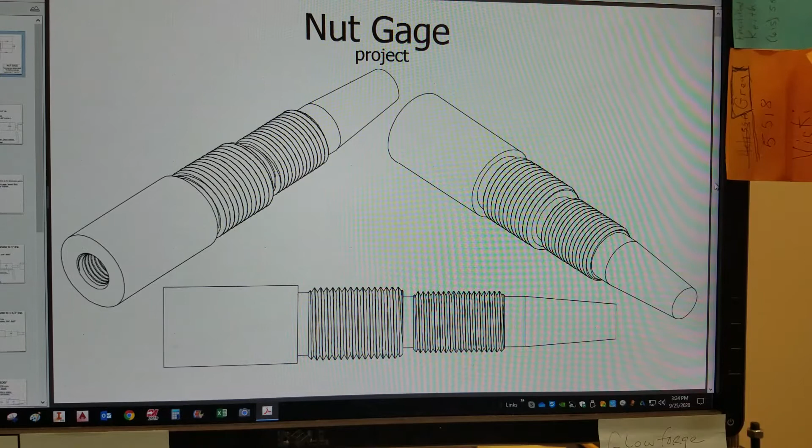Okay, this is the nut gauge project for the ET3210 lab. So let's get started on it. First, there's a couple of dimensions. Well, all the dimensions for the nut gauge. So let's get started with step one. We're going to cut a piece of 1 inch diameter, 6 inches long. So let's go to the cutoff saw and do that.

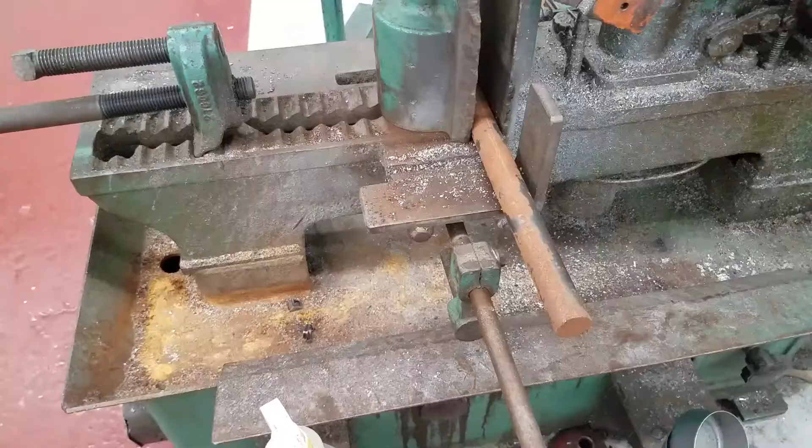There's my 1 inch diameter. I'm going to lower the saw, lock it in. Get a 6 inch piece.

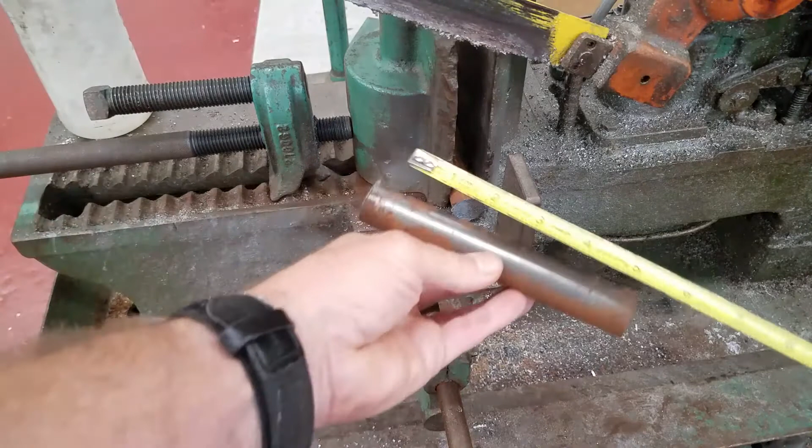Double check it. Close enough. Now we can go to the lathe, face it off and center drill it. Always remember to put your material back in the steel rack or the aluminum rack.

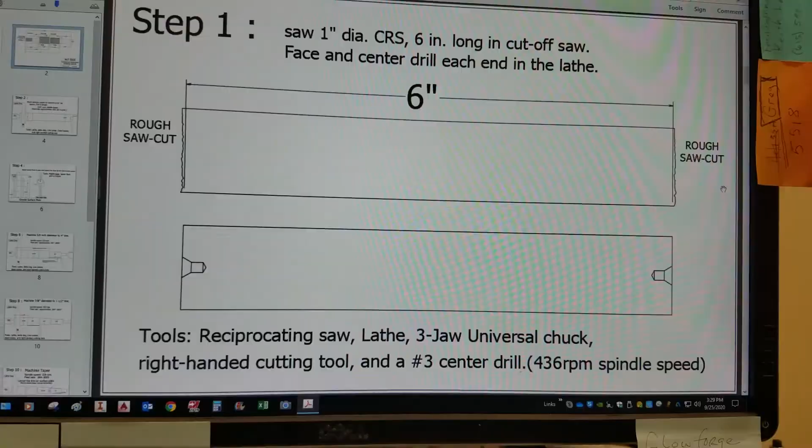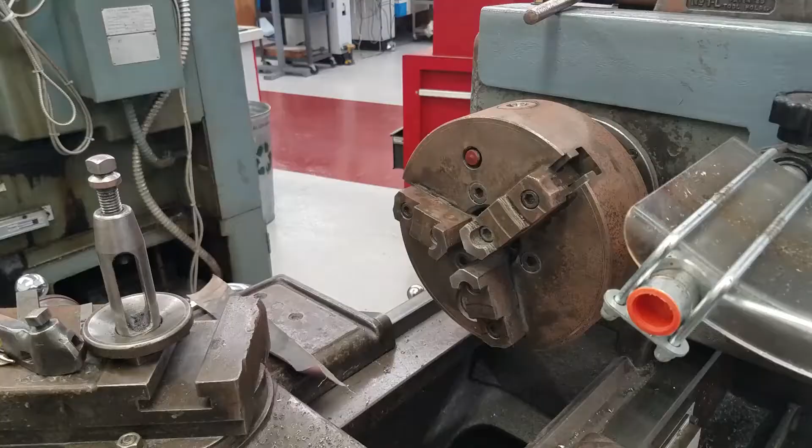Okay, I have a rough sawn piece of material. So I'm going to go to the lathe, chuck it up in a 3-jaw chuck. Use the right-handed cutting tool I sharpened and a number 3 center drill to face and center drill each end. So here we go. Let it stick out of your chuck about 1 inch or so.

Now I want to set up my tool such that it's about a... so that the tip is right on the center. Using my right-handed cutting tool holder.

So I'm going to use my center drill. Put a little mark on the end so I can adjust my cutter height. So I'm going to do 436 RPM. And I'm just going to touch the center. Put a little mark on it.

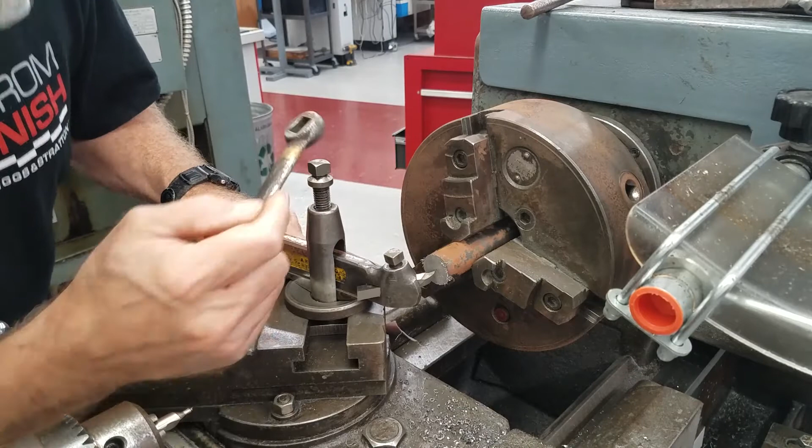That looks close enough. Maybe a little bit higher. And the depth of our center drill should be about halfway.

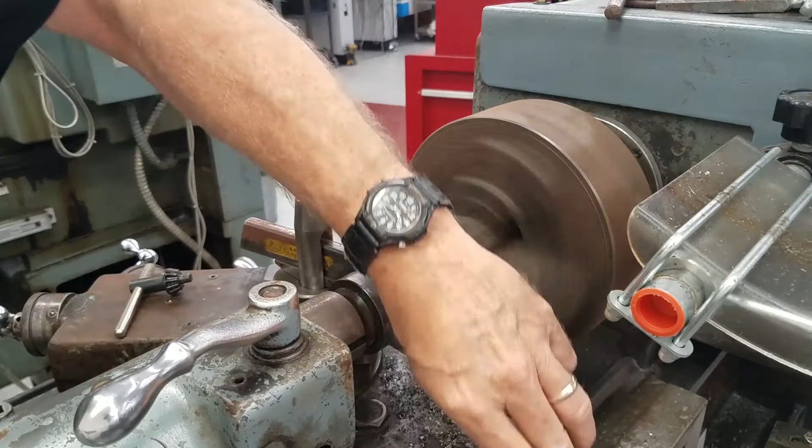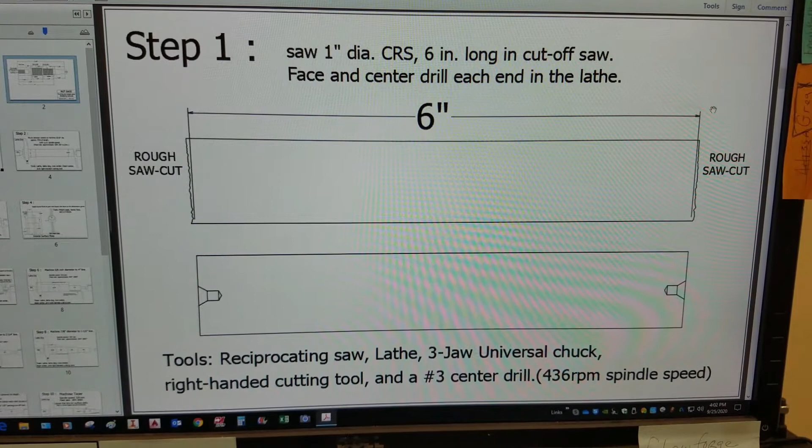Okay, we just finished step one. We faced it and center drilled it, the nut gauge blank. Okay, now step two, we have to turn it down to 15/16. So we're going to find a lathe dog that'll fit over the 1-inch diameter. Use a lathe that has a dead center in it and a live center in the tailstock.

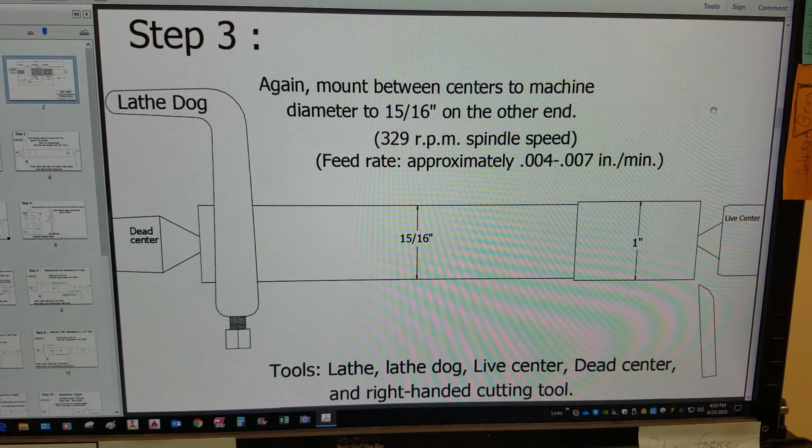So we're going to machine a 1/16 off the diameter. Then we're going to flip it around and machine the 1-inch diameter off the other end while putting our lathe dog on the other end. And then we'll take it to the surface plate. So let's turn it down to 15/16 right now. Here we go.

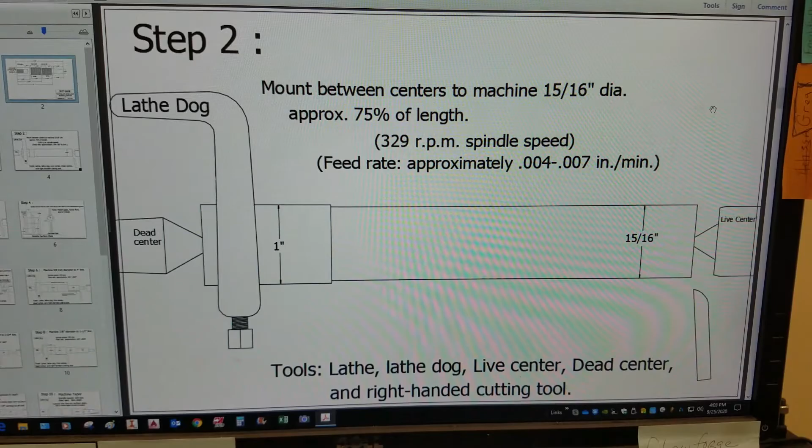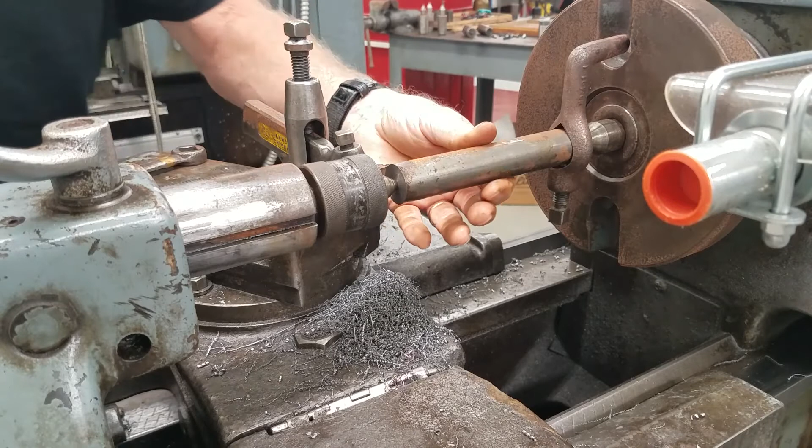Now I'm at a lathe with a faceplate on it. On the lathe dog that the 1-inch diameter will go in. Okay, let's loosen the tailstock. Always be sure and tighten your tailstock. Alright, tighten it up a little bit more. There we go.

Well, it looks like I'm going to have to change my tool holder from a right-handed to a left-handed. So I'll take my tool out, take my holder out, put a left-handed holder in there. Use the same tool, my right-handed tool.

So, I sort of want my tool on center, on my spindle center line. So I'll use my dead center in my headstock, put it on center, maybe just slightly below. And when I say slightly below, maybe not even a 32nd or so. You never want it above center, so okay, that looks like it's above center.